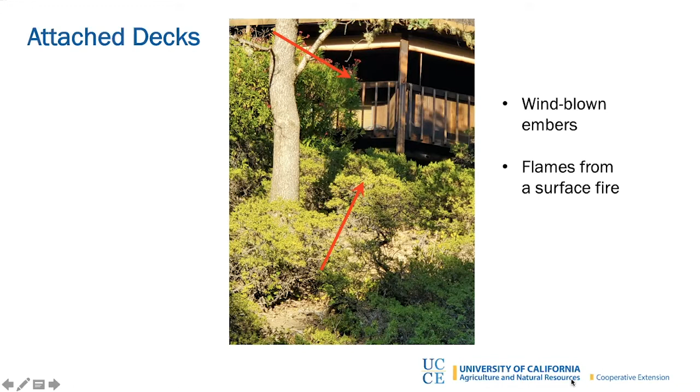So your deck needs to be able to resist wind-blown embers and flames from a surface fire that might be burning from below. We've talked about defensible space and vegetation management on your property. That part is supposed to minimize the chance that flames can burn from below along the ground and get underneath the deck area. So assuming, though, you have done a great job there, your deck will still have to resist embers. And so we're going to be mostly focusing on the ember part of your deck during this particular presentation.

We talked about this near home zone, this non-combustible zone, the 0 to 5 foot zone, whatever you want to call it. It's this area really close to your house that can make your home quite vulnerable to embers if you don't take care of this zone right next to your house, and can make your home quite resistant to embers should you do a good job there.

And there's a lot of things between your deck and your home that make it easy for fire to enter the house, because you typically want to be able to get to that deck from your house. You're going to have a sliding glass door or a door. It's going to be really close to your siding, relatively close to other window type features. So a lot of vulnerabilities should that deck ignite.

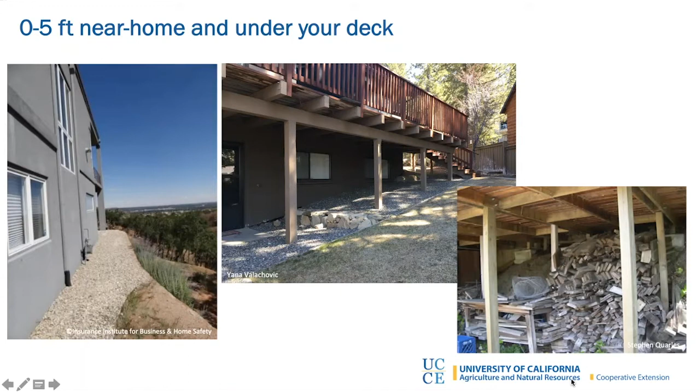So, for me, the deck is my favorite part of the house, and it's something that we ask to perform, both to be able to withstand the rain, maybe the snow, the constant elements outside. And now we just need to think a little bit more about how we can help our decks perform well relative to fire. So if you're like me and you love your deck, then just a little bit of fine tuning can make a huge difference for you in the survivability of your building to wildfire exposure.

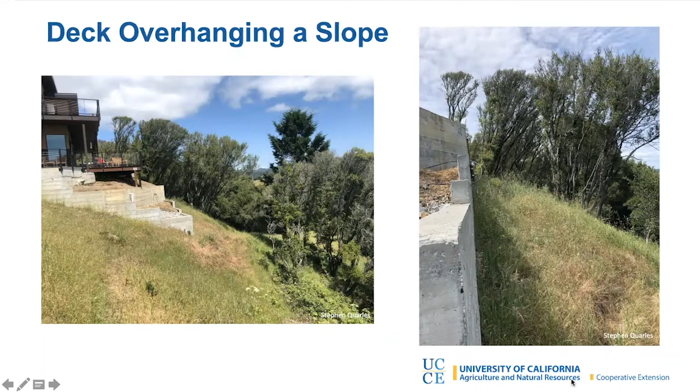That would be your only strategy. But should you have shrubbery or grass, then this downslope non-combustible retaining wall is something you can consider as an additional protective measure for your deck.

When we talk about embers, when I was with IBHS, we did quite a lot of research on the vulnerability of decks to embers. That research continues to this day, even after my retirement. So we're learning a lot about decks. What we do know is that where embers tend to accumulate on your deck is in that gap between the deck boards over top of a joist. So if the embers fall into a gap where the joist isn't, then they'll fall straight through to the ground.

And so this is another reason to keep combustible things out from underneath your deck, because it's going to get embers from below coming underneath the deck, and also from above, those that fall through the gap between deck boards and fall straight through onto the material below. So the ignition will occur in that area between the deck board where the joist is, and then the fire, which will be a small fire initially, will burn to the building, to your home.

And then it's a function of what's on your home in terms of how vulnerable that would be. But if you have combustible siding, then it can ignite that. It can break glass in the window, things like that, or on your sliding glass door. So we want to do things that can make this accumulation less of a problem. And we'll talk about that along the way.

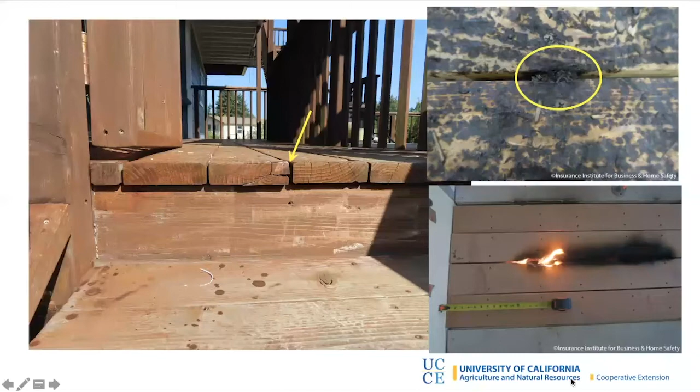Yeah. Well, and so what that really speaks to, though, is this need to be aware of how your deck's conditions are overall. And if you have potted plants on your deck and maybe they drop a lot of leaf material, be aware where that leaf material goes, and just employ a regular maintenance strategy to clean out those gaps, whether that's using something mechanical, or whether that's using a power washer.

Just try not to damage the rest of the deck boards when you do that, because it's pretty easy to spray a little too hard and create some other issues there. But being aware of what you've got, and wider spaces between those deck boards also makes it a bit easier. So if you're starting with new construction, you've got a few more options. That's true. So new construction is easier. Existing construction, there are some things you can do.

As Yana had indicated, increasing the gap between deck boards is definitely a new deck kind of thing, but the typical gap is 1/8 of an inch. If you can increase that to even 1/4 of an inch, that helps minimize the chance that ignited deck boards can propagate so far. And so they might ignite, but then they'll self-extinguish before they can get to your house.

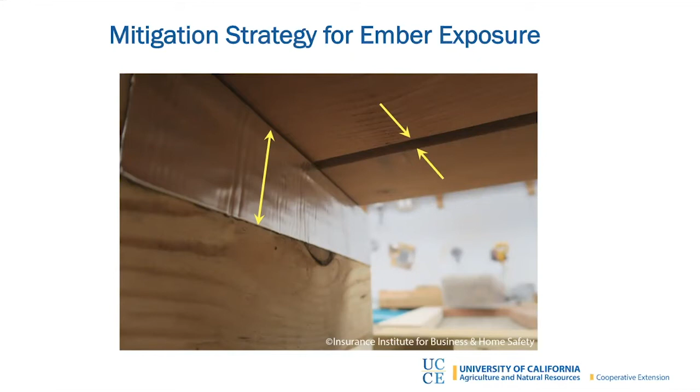It's important that this flashing get tucked in either at a lap joint or into a kerf that is cut with a saw, so that water can't get between the flashing and, in this case, wood siding. You'll have rot developing if you don't take some pretty good care in this installation feature or detail.

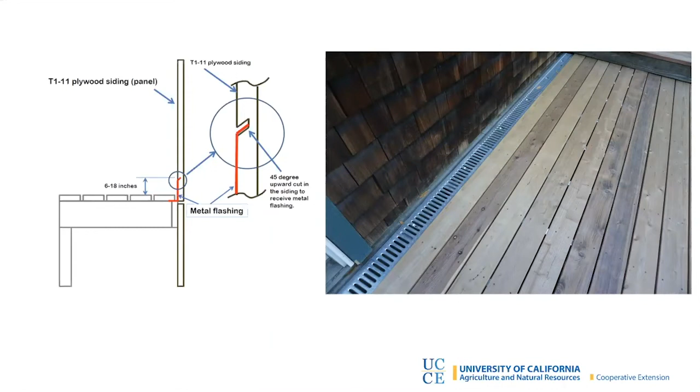I think the point here, though, is that you are protecting the deck and the siding if you can make this area non-combustible. And this is something that is much easier to do, cheaper to do when you have an existing deck. Replacing one deck board, adding flashing, definitely cheaper than replacing the entire deck.

This is just, again, a friend of mine that did this repair, so I got the pictures, but we're using this aluminum flashing in this case. And then this is the end result that we saw last picture, just this replacement of the near home component with this metal grating instead of a wooden deck board.

And did that homeowner also deal with some of the vegetation around the edge of the deck? Because that looks like, especially on the stair rails, there could be some other issues there to keep in mind. Because the whole goal really is to make sure the deck does not ignite. You hope that your home, if you do have wildfire exposure, is protected by the professional fire services. But on the chance that they're stretched too thin and can't make it to your home that night, you want to make sure that you've taken every action to prevent ignition of the home. And the deck is one of the first ways you can get ignition.

That's a good point. This vegetation out at the foot of this deck is further away than it looks. Okay. We need to talk about this one. You're right. There you go.

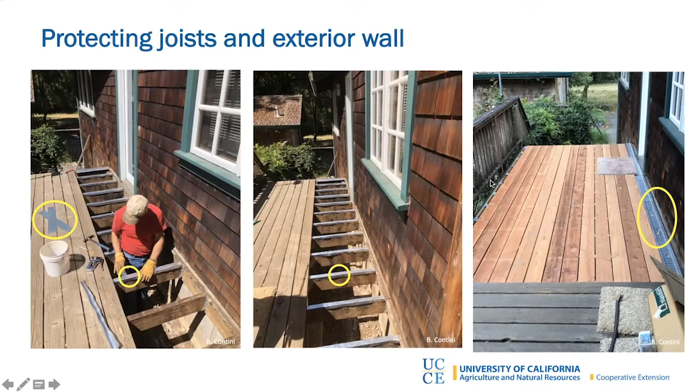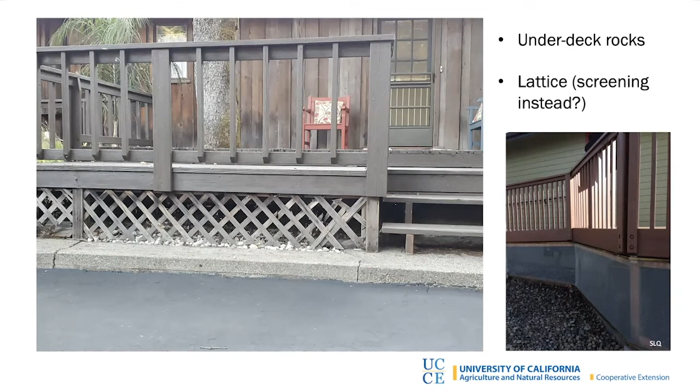that minimizes the opportunity for debris to get blown under there, and it definitely reduces the number and size of embers that can follow. So this is a better strategy because it takes care of the moisture part, allowing air to flow, and it keeps debris and ember entry to a minimum. So this is a better design feature, I think.

But be sure you've got a way to get into that underside area, because there's going to be ongoing maintenance issues. Birds drop seeds. You've got things that fall through the deck, and then you can have plants and vegetation get established under there. So it's not a system that doesn't require you to ever go back underneath that location.

Yes. I find, the amount of light, if it's a deck on the north side, you're going to have less light that gets underneath, and you'll have less vegetation to manage. But on any of those southern exposures, you can have plants growing 6 to 8 feet from the edge of the deck to the interior of the deck.

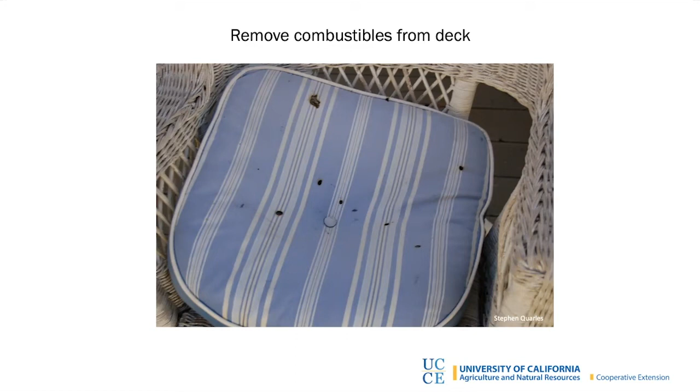Also, I want to remind people, a lot of people have propane tanks as a part of their portable barbecues that are stationed on the deck. So disconnect that propane tank and pull it away from your house as far as you can. Another good strategy. So just to summarize what we've been talking about here, just remember that your near home non-combustible zone applies to under the footprint of your deck. So you want to make sure that's also a non-combustible zone.

This action plus developing and maintaining a good defensible space will minimize the chance that the flames can reach the underside of your deck and impinge on it or touch it. Once flames start touching the bottom side of your deck or your home, it's just much harder for most homes to get around that and resist it.

Redwood deck boards in particular are much more vulnerable to ignition from embers in this gap between deck boards. So remember to remove debris that can accumulate in those between deck board gaps. Denser boards, some of the tropical hardwoods such as ipe, all of the plastic composites are less vulnerable because they are more dense. They're less vulnerable to embers. Some of the plastic composites can be more vulnerable to flames underneath, so you want to just make sure that you do what you can do to reduce that opportunity of an exposure for wood and for plastic composites.

If you are doing some retrofitting, adding this metal flashing that we talked about to the tops of the joists can help reduce the vulnerability of your deck to embers. If you're building a brand new deck, some research has shown that use of non-combustible joists, such as metal joists, can also reduce the vulnerability of your deck, even if you have combustible deck boards.

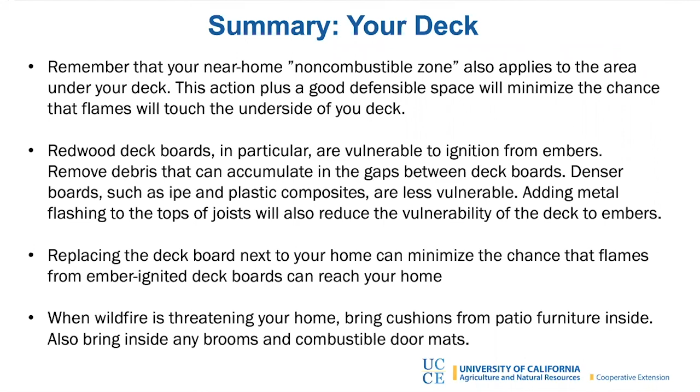And just remember, as we said, when wildfire is threatening, bring cushions and the smaller furniture inside. This includes brooms and combustible doormats and the like. This will help also protect your home from embers and ignition that can occur.

Just remember, if your deck has one of those beautiful views and it's overhanging a slope, I really want to encourage people to prioritize action around their deck immediately, because fire burns uphill and will preheat and will help dry out that deck and will also cast a lot of embers at the deck. So there's a particular vulnerability in that situation that deserves some very quick and speedy attention so that your home has the best chance of survival.

So if you're in the game of new construction, you've got a lot of options and some new design details that can make a difference, and especially including that flashing on the top of wooden joists. Very cheap, simple solution that's quite elegant. And so, think about how you prioritize upgrading and maintaining your deck through time, because this is one of the key vulnerabilities in your home.